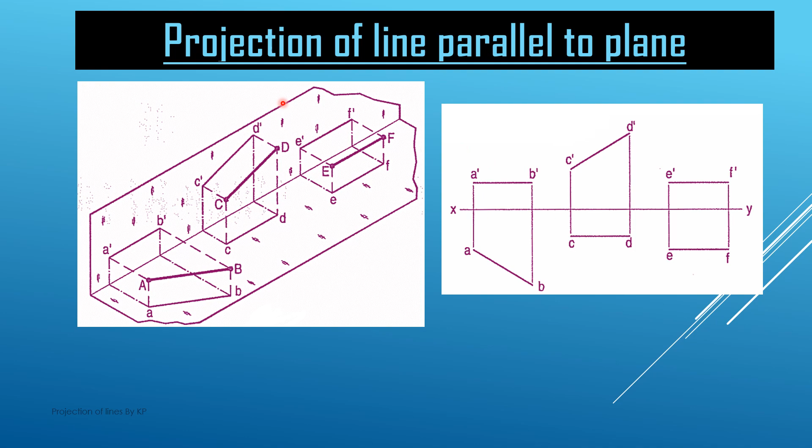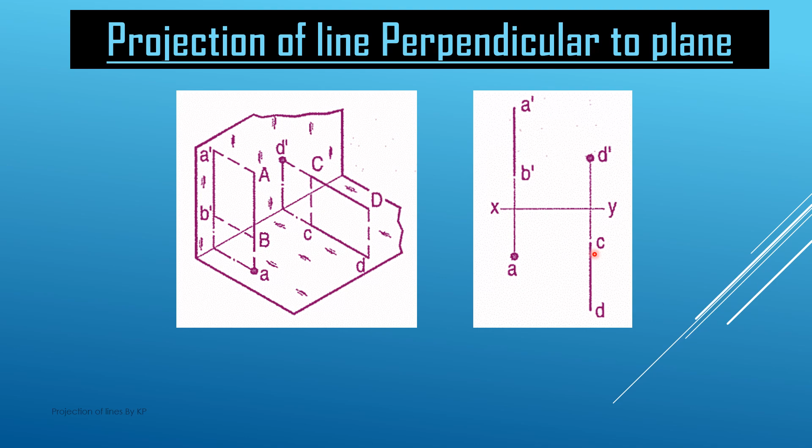If we see it in 2D, this is the XY line which represents the intersection of both the planes, and a dash and b dash are the projection on the VP, and a is the projection of this line AB on the HP. Similarly, d dash is the projection of the line on the VP, and cd is the projection of the line on the HP. This is the case when the lines are perpendicular to any of the planes, HP or VP.

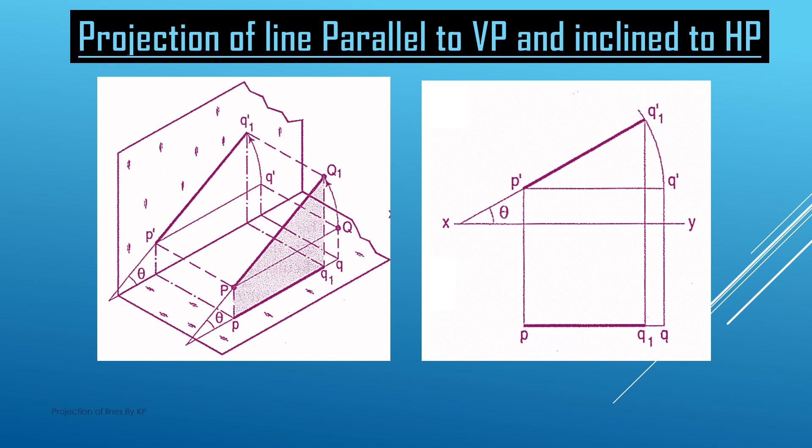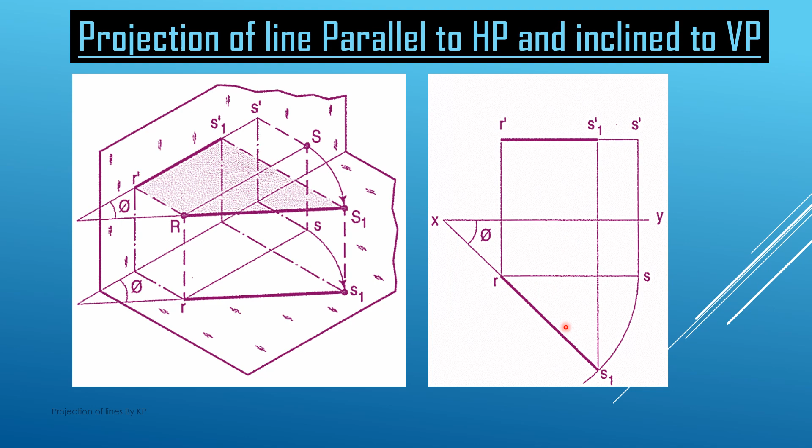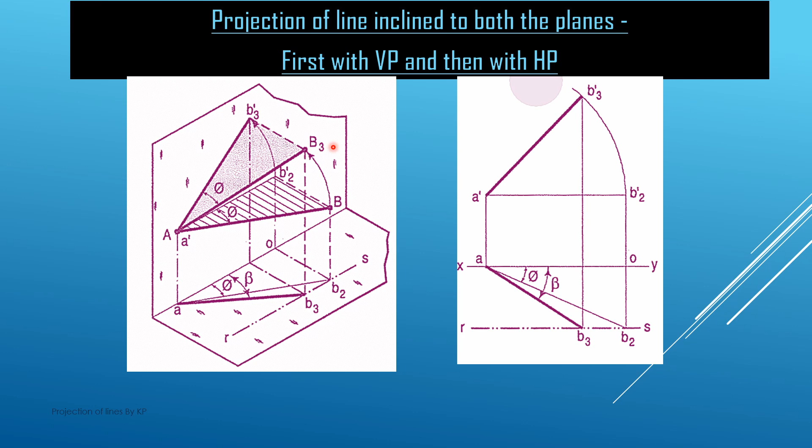Now we draw the vertical projectors, or we see the projection of B3 on the horizontal plane, which is small b3 here. Now we join A and b3, and we get the final projection of this line, which is making an angle theta with the HP and an angle phi with the vertical plane. This B3 point we can also get in the two-dimensional representation.

We got the projection of point B3 on the vertical plane as B3 dash, and now we draw the vertical projectors from B3 dash, meeting the XY line at this point, and then draw the horizontal projectors, reaching the point b3 here. And RS is the locus along which the projected point B2 moves to the new position B3, and they are at the same angle phi from the vertical plane.

Now in the two-dimensional representation, we start with A; A dash and B2 dash are the projection of the line on the vertical plane, and AB2 is the projection on the horizontal plane when the line makes an angle phi with the vertical plane. Now we rotate the line A B2 dash by an angle of theta degrees about the A dash point, and B2 dash reaches B3 dash here, and this angle is theta because the line is making an angle theta with the horizontal plane.

Now we project this B3 dash point on the horizontal plane. Now we draw the projectors here, and we see that these projectors are meeting the locus line RS at this point B3. Okay. Now this point B2 is changing from this position to the B3 position, and if we see the inclination of this B3 line, it is making an inclination of beta from the XY line basically. So A dash and B3 dash and A and B3 is the final projection of the line when it is making an angle theta with the HP and an angle phi with the vertical plane.

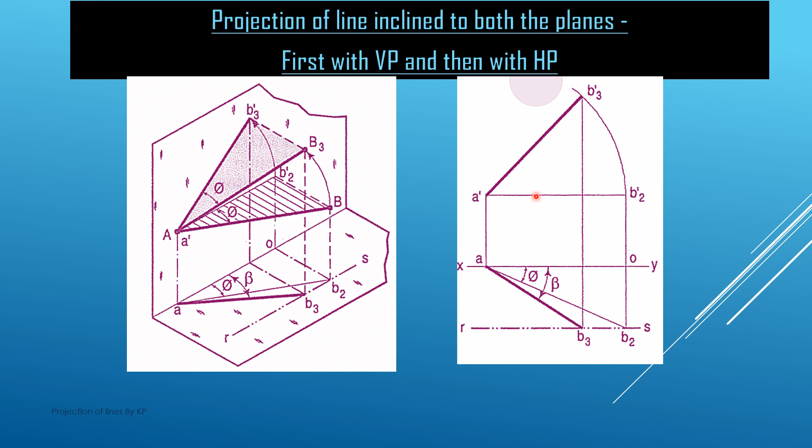So in the previous slide, we start first with the line which is making an angle theta with the HP and then inclined by an angle of phi. In this slide, we first consider that the line is inclined at an angle of phi with the vertical plane, and then it is making an angle theta with the horizontal plane.

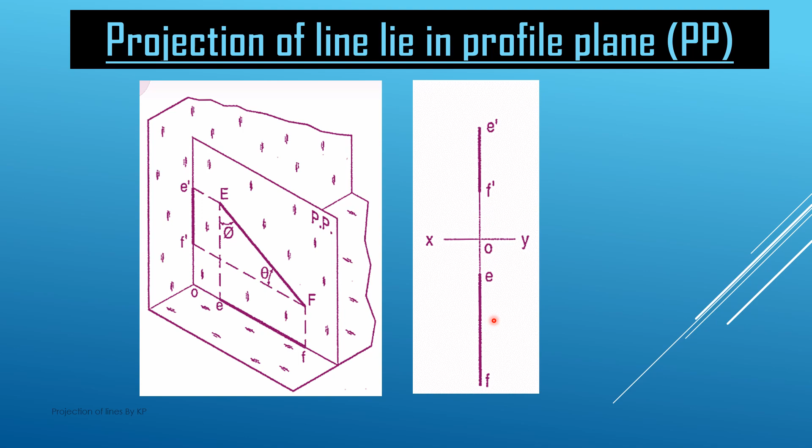So we know that the sum of the angles is 180 degrees. So this way we can find out, and this angle is 90 degrees here. So this is the final projection of this line which lies in the profile plane on the horizontal and the vertical plane. This is the two-dimensional representation. So E dash and F dash is the projection of this line on the vertical plane, and E and F are the projection on the horizontal plane, and they are along the same line basically. So this is the projection of the line when it is in the profile plane.

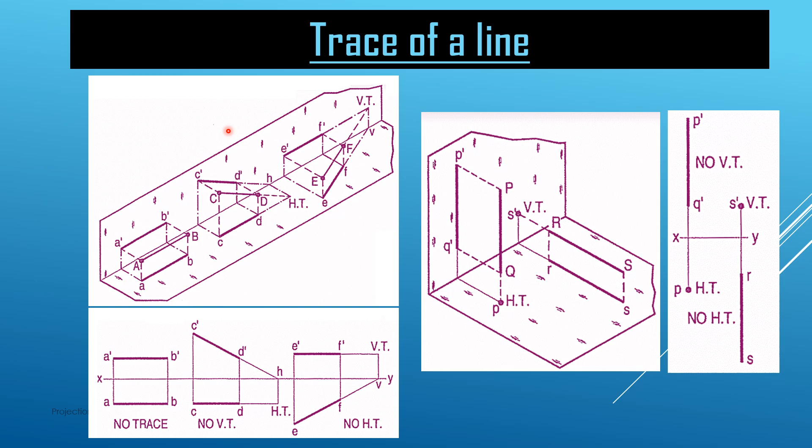In this video we discussed the projection of lines when the line is parallel to both HP and VP, when it is parallel to one of the planes and inclined to the other, and when it is inclined to both planes. We discussed the projection of lines in the profile planes. We also discussed the concept of traces.